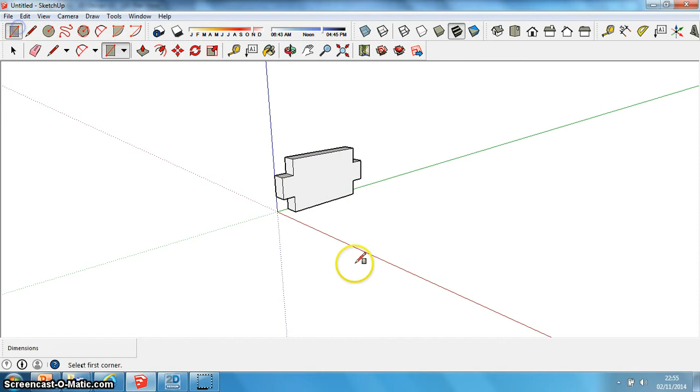Okay, so rectangular tool, click and drag, and we said it was 12mm, comma, 100mm. There we go. Push pull tool up to the 50.

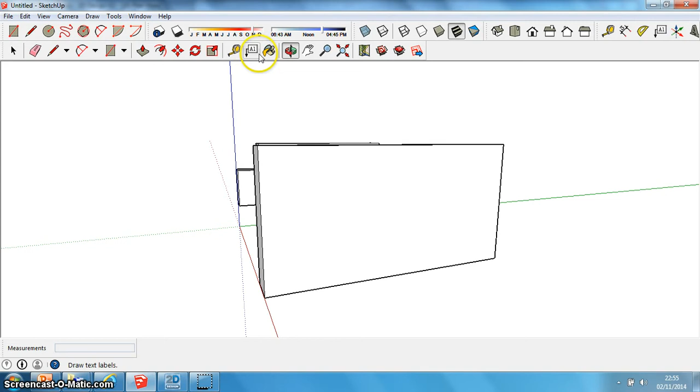Now I'm going to follow exactly the same process again, but this time I'm going to remove the middle fixing, the middle part of the comb joint. So tape measure tool, click once from the edge, 12mm. Go from the top down 15, from the bottom up 15, and from the right hand edge 12.

Hopefully you understand these measurements. If not, try to just spend a minute or so just trying to get your head around why I'm typing these dimensions in. Obviously the dimensions you type in will be your own dimensions, not my dimensions.

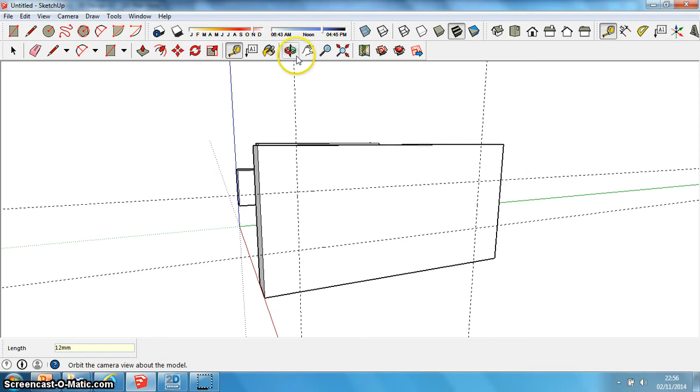I'm just going to orbit to one side. This time, instead of drawing out for the male fixing, I'm going to draw out for the female fixing. So this means the inside bit here.

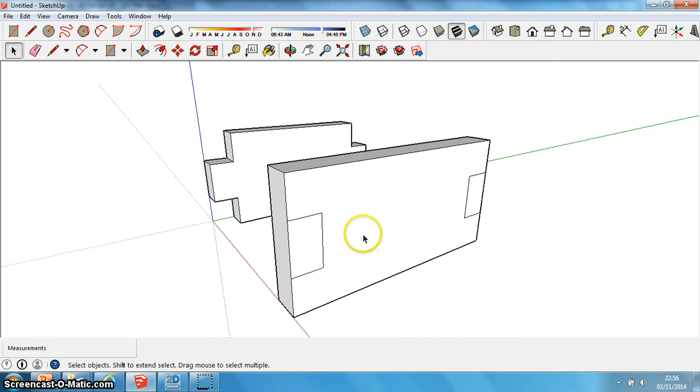Really get used to using this tape measure tool because it's so useful. And importantly, get used to deleting those lines, because otherwise when you've got a really technical drawing you'll end up with measurements all over the place. It just becomes very difficult to interpret.

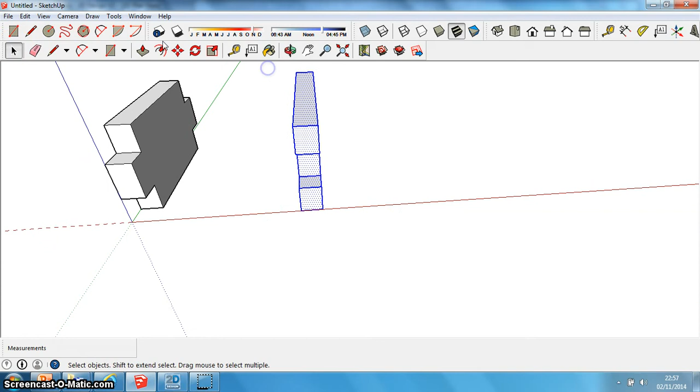Okay, so push pull tool now. Oops. Orbit around. And I'm just going to select that entire shape and edit, make group. Brilliant. Okay, so I've got all the fixings I'm going to need.